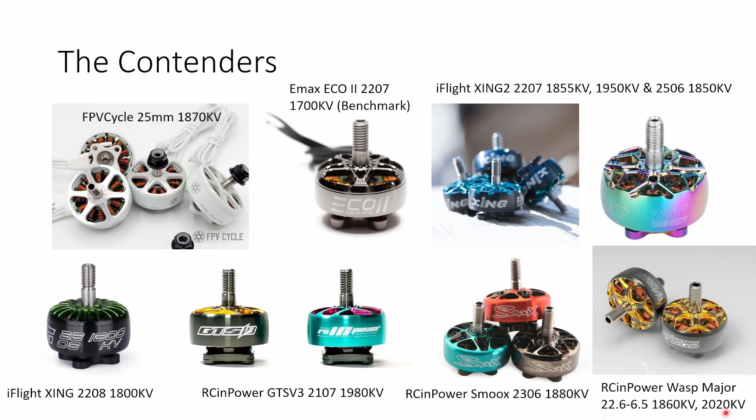When we're looking to pick the best motor for any quad, not just 5-inch freestyle, we want to look at the key features and durability of the motor. We also want to know the thrust, the efficiency, the power and the responsiveness of the motor, because that's going to be really important to how the quad flies and feels in the air. We also want to consider the size and the weight of the motor, because not only is the motor a significant portion of the quad's weight, but because it's so far out on the ends of the arms, it has a really big effect on the moment of inertia of the quad on all 3 axes. So it's really important to get that size and weight balance right.

All of the performance numbers that you're going to see in this video were taken using a 5 by 4.5 by 3 V1S prop made by HQ. Now this is a relatively steep 5-inch freestyle prop, and so it should be putting the motors under a very representative amount of load.

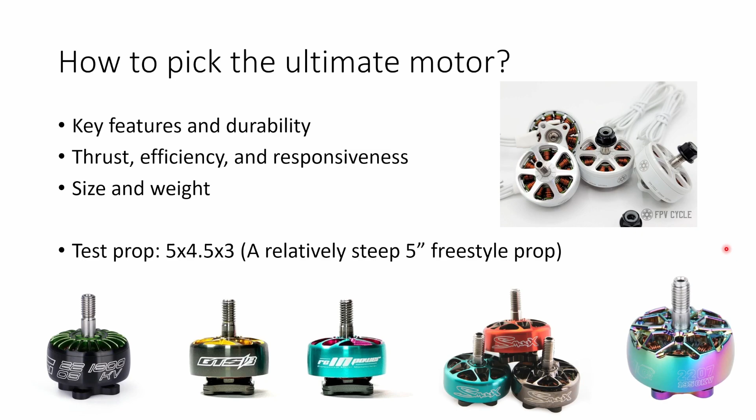The first feature that I want to talk about is Unibell motors versus motors that have 2-piece bells. Now, the vast majority of the motors we're going to be looking at today are Unibell designs. And what that means is that the bell, that's typically machined out of aluminium, extends all the way down over the flux ring and the magnets. This provides a lot of area to friction fit the flux ring into the bell, and basically makes it impossible for the flux ring ever to fall out of the bell, even in a very, very hard crash.

In a 2-piece bell, which is used in the ECOIIs and in the FPVCycle Imperials, rather than the flux ring being fitted into the bell, the flux ring is friction fit onto these tines that come down from the bell and separate the magnets of the motor. Now, these tines obviously have a very small area compared to the whole area of the bell, and therefore the friction fit of the flux ring is not so secure, and in a hard crash the flux ring can actually slide down the tines, and this often results in the tines being bent, the magnets potentially coming loose, and can often result in basically the destruction of the motor.

So I know that FPVCycle are working on Unibell designs for their motors, but as of right now I would always suggest prioritizing a Unibell design motor, because it's just not going to have this problem of dropped bells in heavy crashes.

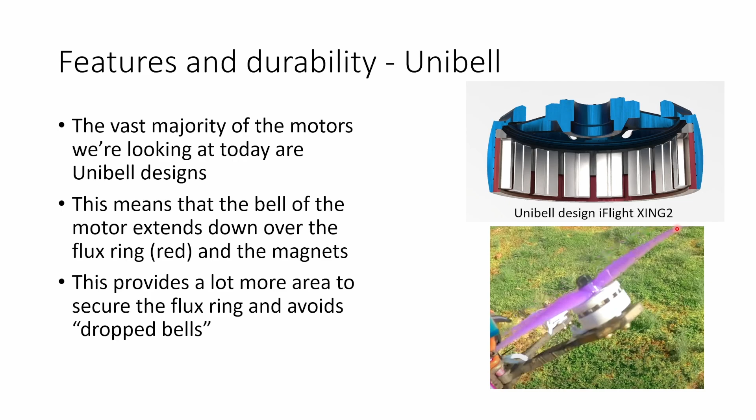And that really does contribute to the durability of the motor. Another feature that I think contributes to the durability of a motor is a shock-absorbing O-ring.

iFlight include a small O-ring between the bell and the top bearing on their Xing and Xing 2 motors, and you can see here I've tried to bring it out in green in this schematic. This O-ring is designed to reduce the vertical shock to the top bearing in a hard crash.

Bearings are most delicate in the axial direction, so the easiest way to damage a bearing is with an axial impact. Having this small O-ring here will just cushion that blow a little bit and hopefully prolong the life of the bearing. I think it's a nice-to-have feature. It's certainly not essential, but it's good to see an attempt to protect that bearing against that type of impact.

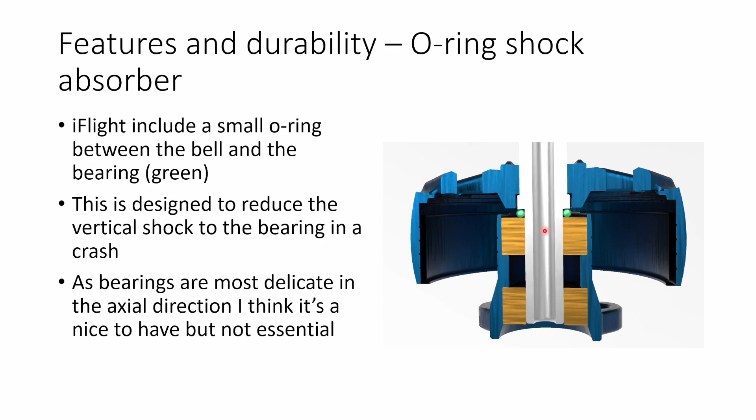That brings us on to thrust and efficiency. I've plotted all 10 of the motors that I've tested on a graph of thrust on the x-axis versus electrical power consumed on the y-axis, so you can compare how much thrust each motor produces and how much power it requires to do that.

If we look at peak thrust first, we can see that the 25 size motors, the 2506 and the 25mm motor, put up the biggest thrust numbers. And that's to be expected. The larger the motor is, the more torque it's going to have and the more thrust it's going to be able to produce on any given prop.

However, it's also worth noting that the WASP motor with 2020 kV, a slightly higher kV 22.6 by 6.5mm motor, also put up almost exactly the same thrust as the FPVCycle 25mm, although it did consume just a little bit more power to do it.

And we also see that even a 2107 sized motor could put up more than 1600 grams of thrust, provided that the kV was high enough. So when we're looking at these larger size motors, we also have to consider motors that are smaller but have a higher kV, because they can draw a similar amount of power and produce a similar amount of thrust.

The important thing to be aware of here is that smaller motors drawing as much power as bigger motors are going to get hotter, so that's something to be mindful of. And if you find that a high kV motor is getting too hot but you still want the same power, you can move to a bigger size, and it should be a motor that stays cooler.

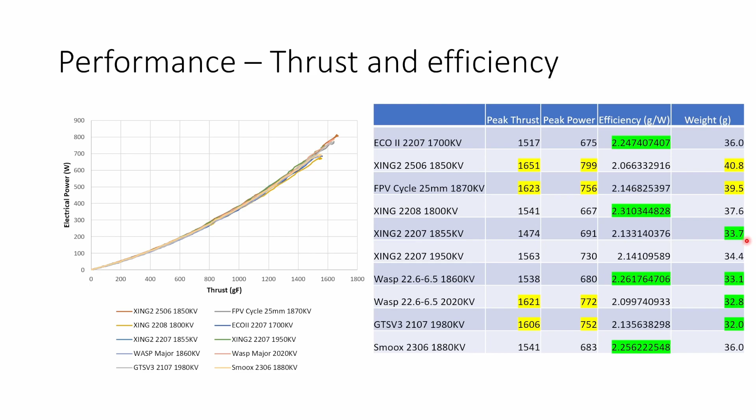The smaller motors, and particularly the RCinPower motors, are quite impressive in terms of weight. They're coming in at under 33 grams, most of them, and that's really impressive. The Xing 2 is also very respectable at 33.7 grams. The exact weight you get when you weigh these motors is going to depend on the length of wire that they have. All of these motors were measured with the same length of wire.

If you're shopping for motors, you're going to be exposed to a lot of marketing BS that you need to be inoculated against. And if you've been in the hobby for a while, you probably already know what I'm about to tell you. A lot of motors are marketed as having improved low throttle control, improved low throttle management, better low throttle resolution, and all of this is just BS.

All motors I've tested have almost exactly the same shape thrust versus throttle curve. No motor can claim to have improved low throttle control over any other, it simply doesn't happen that way.

Motors that make less thrust overall, because they're smaller or they have a lower kV, are going to have more resolution across the whole throttle range, because the same movement of your throttle stick is covering a smaller range of thrust. A big, powerful motor, particularly something like a 25mm size motor, has a lot of top end thrust, and therefore it's also going to have less resolution at the low end. The same movement of your throttle stick is covering a wider range of thrust, so you have less resolution.

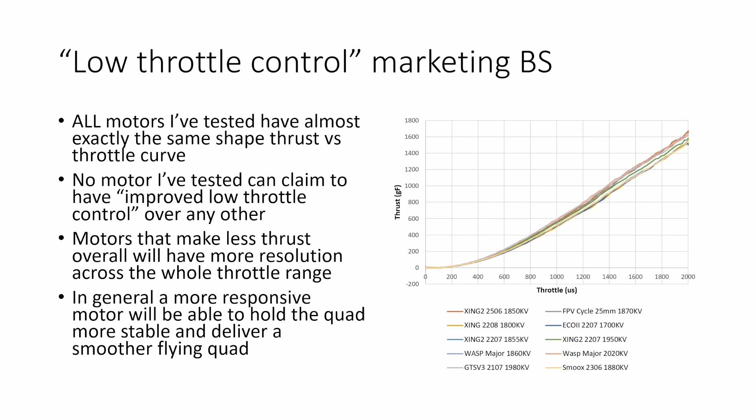In general, a more responsive motor is going to be able to hold the quad more stable and deliver a smoother flying quad. Also, a lighter weight motor, which has less moment of inertia that it's contributing to the quad, is also going to allow the quad to fly a little bit smoother. So looking for motors with good responsiveness and good power to weight ratio is also important.

If we look at the responsiveness of the motors now, I think it tells a really interesting story. As we would expect, taller and narrower motors accelerate faster than shorter and wider motors. So we see really great performances from the 2107, the 2207, and the 2208 size.

However, the bigger motors, the 25mm size motors that have more torque because they are bigger, do not accelerate any faster with this prop than the 2207. Clearly, although they do generate more torque, they also have greater inertia, and that's definitely counteracting the greater torque that they can produce.

The other interesting result is that the Xing 2 motors with their center slotted magnets are very, very fast to accelerate, among the fastest on test. But they are slightly slower to decelerate. So there may be something about those center slotted magnets that, while they're reducing the amount of torque ripple the motor is experiencing, may also be affecting braking performance just slightly.

That said, I think that the improvement in acceleration is probably worthwhile having, even if you do see this small penalty to the deceleration of the motor.

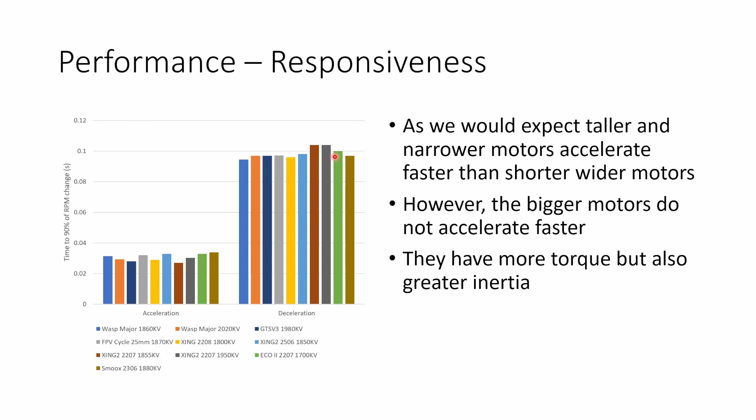This brings us nicely to the key question that I want to tackle in this video: when should you choose a bigger motor, i.e. one with a larger stator volume, and when should you pick a motor with a higher kV, assuming that what you're looking for is more performance, more top-end thrust and power?

We can see the trade-off here by looking at torque versus RPM and amp draw versus RPM. If we look at torque versus RPM for a standard 2207 motor, the torque curve is going to look like a straight line that's just linearly decreasing. What this means is that as the motor spins faster, it's capable of producing less torque. The reason for that is that the back EMF builds up as the RPM increases.

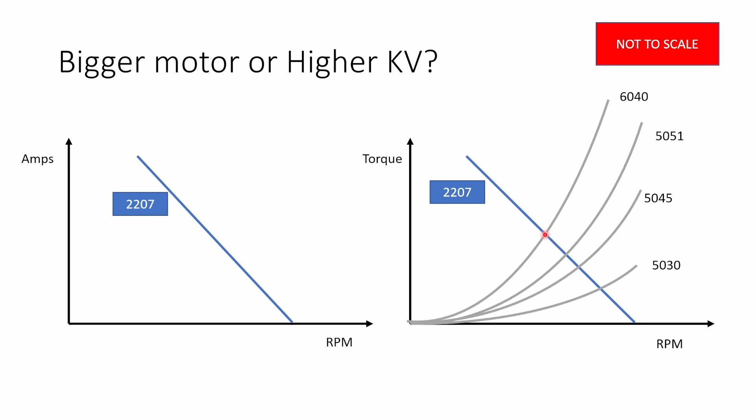Now let's look at a 2506 motor. This is a larger motor with more stator volume, but it has the same kV as our 2207. Because it has the same kV, that means that its no load RPM, i.e. the RPM where it generates zero torque, is going to be the same as the 2207.

And also consume more current at every RPM. This is because when you have a motor with the same kV, the relationship between the torque that the motor produces and the current that it consumes is the same. So if the kV is the same, but the 2506 is producing more torque because it's a bigger motor, then it's also going to be consuming more current. There's no free lunch, I'm afraid.

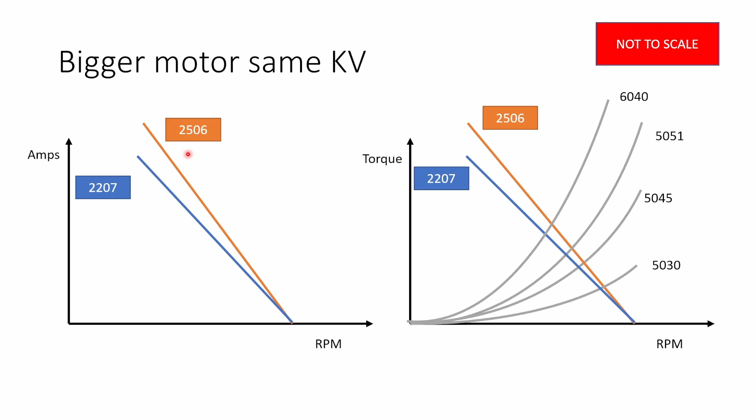But now let's compare that bigger motor to a 2207 with more kV, higher kV. Now a higher kV motor is going to produce a little bit less torque at low RPMs because of joule losses. And if you want to learn more about joule losses and pretty much everything to do with how FPV motors work, I've got a Motor 101 video, which I'll link down in the video description.

A motor with a higher kV is going to have a higher no-load RPM, i.e. a higher RPM where it generates zero torque. And you can see that it's able to produce more RPM and therefore more thrust on that 50-30 prop than the larger 2506 motor. It's actually able to produce the same thrust on the 50-45, but then you can see it starts falling behind the 2506 on the heavier props, something like a 50-51 or a 60-40.

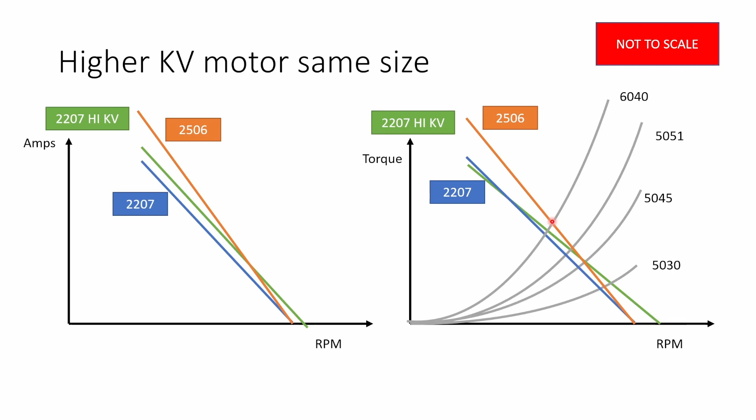So we can see that a lighter prop is going to perform better with a higher kV motor of a slightly smaller size, whereas a much larger prop is going to be performing much better with a larger motor with a lower kV. A bigger motor is going to stay cooler because it's got more surface area to cool down, and it's going to have a lower current density, so you're going to have less resistive heating.

The bigger motor is going to provide more thrust, but it's going to draw more current to do it. You can't get around that. The cons of a bigger motor is it's heavier and actually probably less responsive, particularly if you're using it with a very light prop, because it's actually the motor's mass that it needs to accelerate more than the prop's mass.

Higher kV motors provide more thrust and more power for the same weight, so you're getting that extra performance for free in terms of weight. And they perform much better on lighter props, which is what most people are flying nowadays.

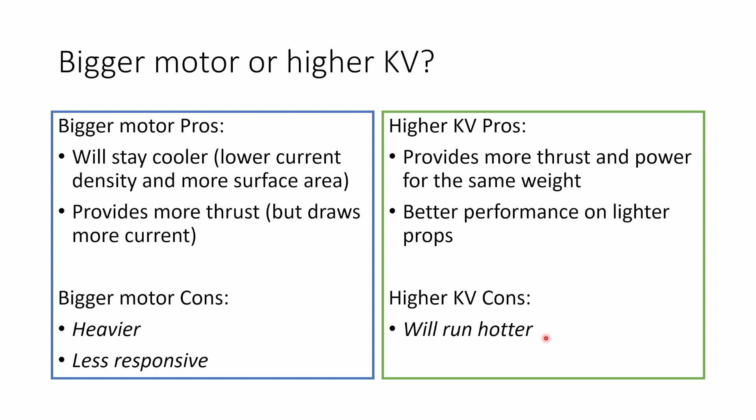The cons of a high kV motor is that they're drawing more current, they're producing more power, they're consuming more power, but they're still a small motor with a limited surface area. So they do tend to get hotter. And particularly if you're spending a long time at very high throttle, then they are more likely to overheat.

One of the results from my testing that I wanted to call out really clearly is that I found that 25mm or 2506 sized motors offer really no benefit over a 2207 size motor for even a relatively steeply pitched 5-inch prop. If you like the extra thrust and power that the 25mm or 2506 size motor gives you, then I would suggest considering a 2207 motor with around 2000 kV on 6S to achieve equal performance on most typical 5-inch props, whilst saving you up to 30 grams in weight.

And 30 grams, particularly when it's 30 grams on the ends of the arms, is a lot in terms of the moment of inertia of the quad. It should really significantly improve the flight performance. In my opinion, the 25mm or 2506 size motor is better suited to something like a 5.5 or maybe a 6-inch prop, where that prop has more moment of inertia, and therefore the extra torque that the larger motor can provide is going to be better utilized.

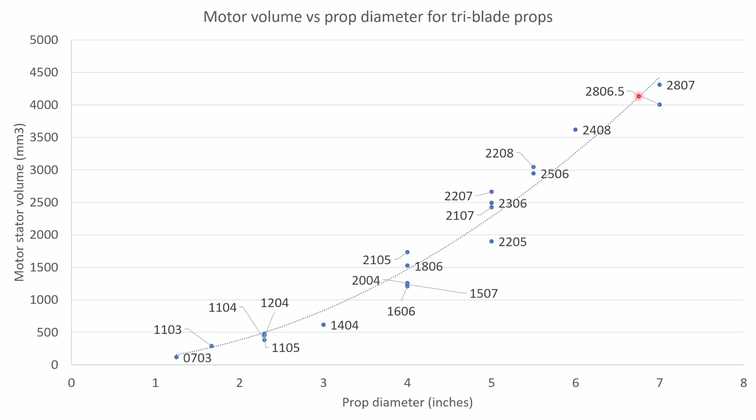If you're running a very light prop and you're looking to save motor weight, you can err on the lower side. If you're running a very steeply pitched prop, or a prop with more blades, or a bullnose prop, then you can err on the higher side. But this dotted line here should be good for a typical tri-blade prop of a given diameter.

So that brings us to conclusions. I'm going to take you through all of the motors that I've tested and give you my opinion on each of them. Hopefully by the end, you'll have enough information to decide which motor is right for you.

I've divided the motors into 3 categories to make things a little easier to compare them. I've got motors that are 5-inch size with moderate kV, 5-inch size with higher kV, and then larger motors that are more suitable for 5.5 or 6-inch props. So let's get into it.

We're going to start with 5-inch motors with a moderate kV and the Emax ECOII. Now, this is a great budget motor. It's very inexpensive, it's pretty efficient, it produces plenty of thrust and power. It does have a 2-piece bell, so there is that durability concern that the bell might separate in a hard crash. But it's a relatively inexpensive motor.

If that were to happen to you, you'd probably be happy to go and buy another one. And it's a great benchmark motor to compare other more expensive motors against, because it just does so many things so well for such a low cost. Obviously, with such a cheap motor, the quality of the bearings is perhaps not going to be so high, and maybe you would expect the durability of the bell also not to be quite so high. But I fly these and I find them fine.